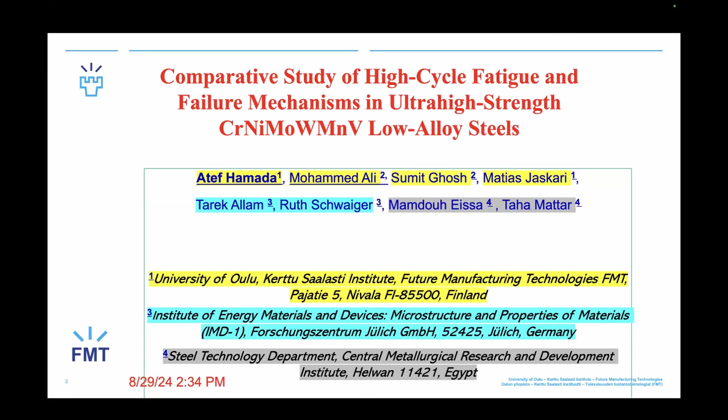This was part of the PhD program from Mohammed Ali, and so Matias, he conducted the fatigue test, and Sumit, he made some microstructure analysis, and Atef Hamada, myself, I conducted fracture analysis and wrote the paper, which in future could be published in this proceeding or journal, but let's see.

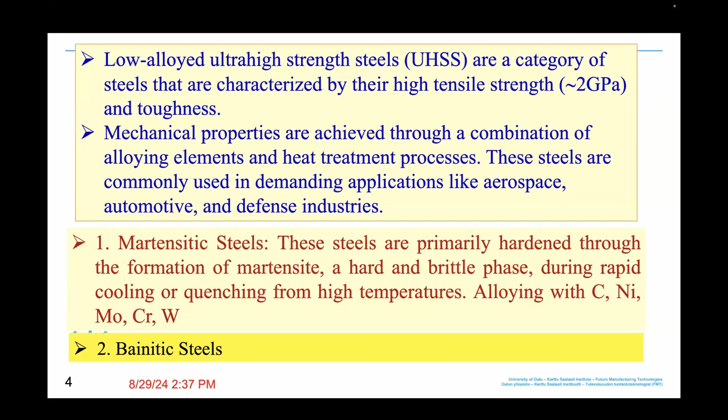So we have different steels based on the design. The first steel of the ultra high strength steel category will be martensitic steel, and this is our steel, and bainitic steel second. Third will be dual phase steel, which consists of soft ferrite and hard martensite phase. Fourth will be precipitation hardened steel, to achieve high strength through formation of fine precipitates during aging treatment.

So mainly this steel is for dent intrusion resistance, resistance for local deformation. For example, during accidents for the car, we could normally use it for automotive panels, and also for military defense structures, because the yield strength should be almost 1 gigapascal, and the strength should be 2 gigapascal. We're not talking about second generation or third generation, but now talking about the strength of our steel.

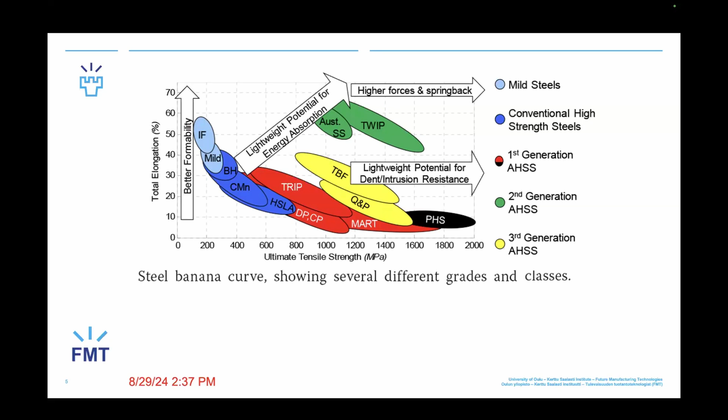This is the banana curve. I think all of us have the idea about this banana curve. Now our study is mainly for designing ultra high strength steel with target strength of 2 gigapascal, and also to study the positive impact of oxide cleanliness, because this steel is melted and cast in Egypt.

But now our friend, he studied his PhD in Finland, and he got this material in Finland and made processing in Finland, but he didn't make electroslag remelting to clean the steel from non-metallic inclusions. So now we want to study the effect or impact of cleanliness on our steel and fatigue behavior of the steel.

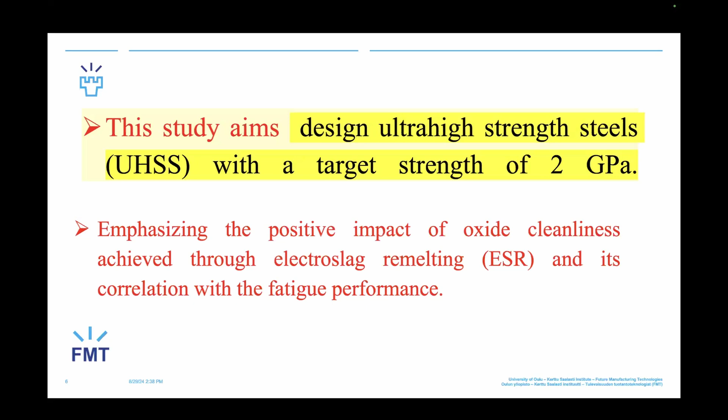Part of this work was published in Materials Science and Engineering A, but here we studied thermomechanical processing and physical modeling and hot deformation for this material. So okay, now we have the second part.

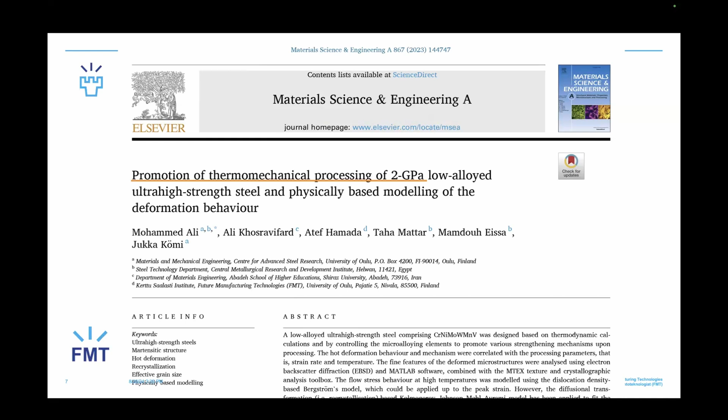Let's look to just 2 or 3 minutes about design consideration of our steel based on chemical composition. You can see here we have two ultra-high strength steels, steel A and steel B. We have differences in carbon content, mainly in nickel content, selecting 2% and 4%. Tungsten is almost the same, and we have moly about the same as well.

During forging and processing of steel A, the structure will mainly be full martensite plus a few percent of retained austenite. But because of the low carbon and high nickel, this steel will enhance bainitic transformation during air cooling. That's why we have carbon at 0.3 and chromium slightly higher than in the second steel. Chromium is a strong carbide former. We have moly and vanadium and tungsten in both, but mainly the difference is in carbon content and nickel content, because this enhances full martensite.

This steel will have almost a dual phase structure: martensite plus about 50% bainite.

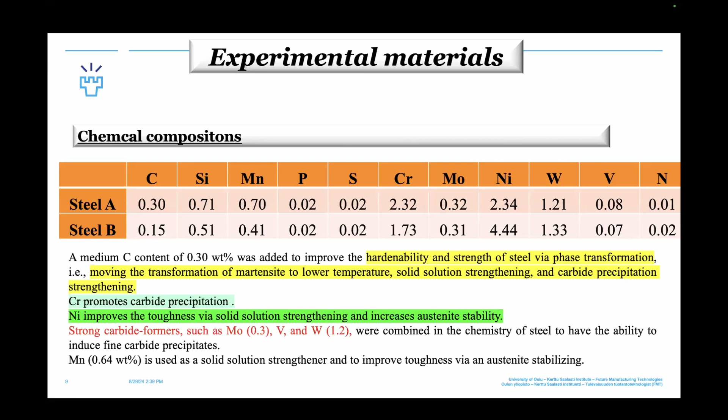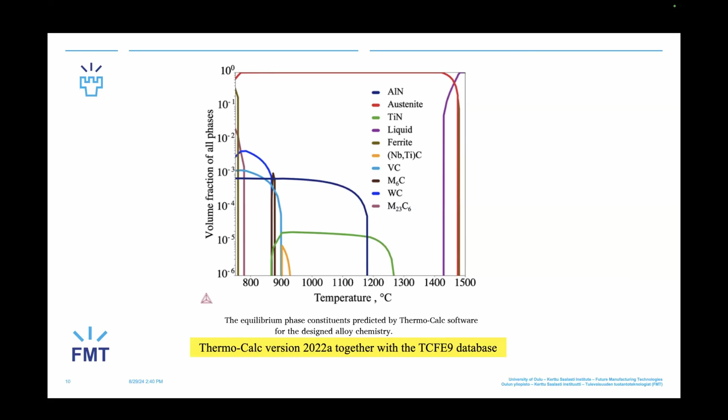This is a ThermoCalc simulation from the first steel using the TCFE database. You can see different carbides that enhance the strength and yield strength, mainly tungsten carbide, vanadium carbide, and niobium-titanium carbide, and mainly the matrix will be austenite, so during air cooling it will mainly transform to martensite.

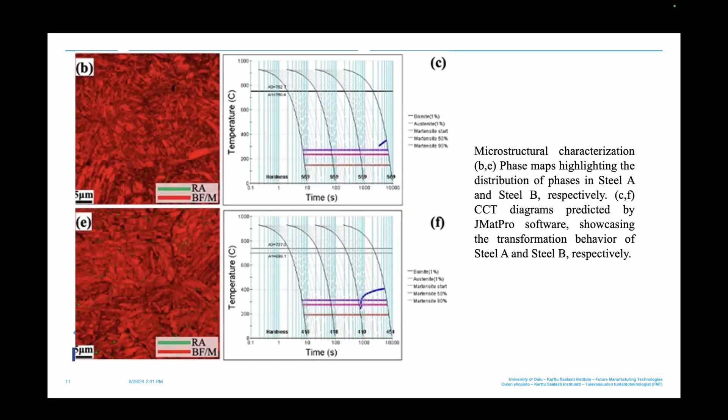So here we have this theoretical CCT diagram, but actually we can see now from the results. Of course, we started fatigue testing under force control with stress ratio R=-1 using an Instron model 8800 control, and we also have this very strong machine with load capacity of about 250 kilonewtons.

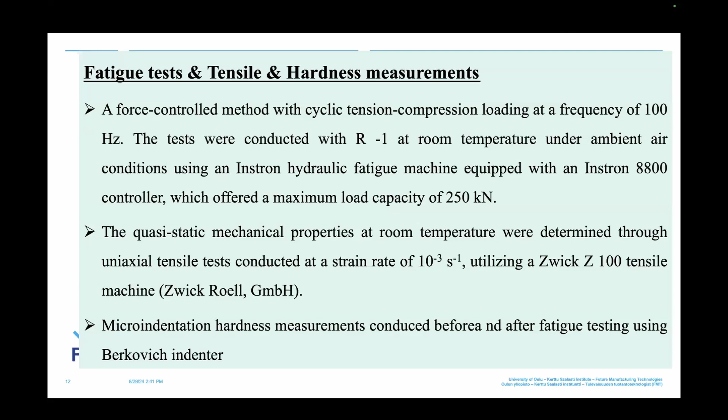After that, we studied the mechanical properties using quasi-static testing with a Zwick machine at a strain rate of 10⁻³. We also studied micro-indentation hardness to see the cyclic softening and hardening effects, the effect of cyclic deformation on the two materials.

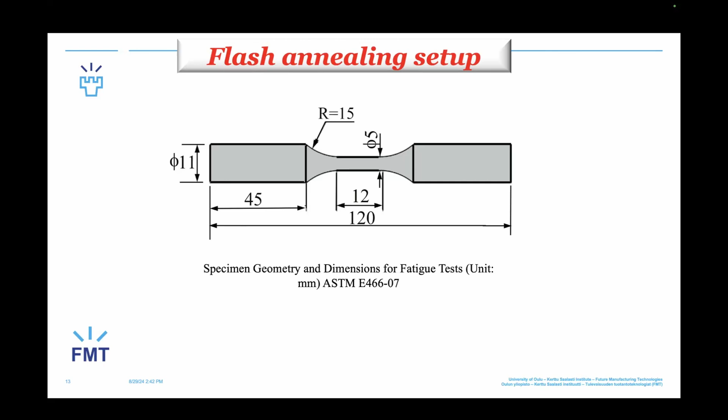In the research center in Germany, we used this new microscope called RoboMet 3D. This is a new technique to detect non-metallic inclusions or any defects in cast material using a robotic system. It performs mechanical polishing automatically.

For example, you can order the robot to perform 1 micron mechanical polishing, then take a picture, and send the robot back to perform another 1 micron polishing step, repeating this process. After about 72 images, it reconstructs the images and gives you a 3D representation of non-metallic inclusions.

It's very interesting, this new microscope at ULH in the research center. I will now present the results of RoboMet to show how this technique can be used to detect any defects in the material.

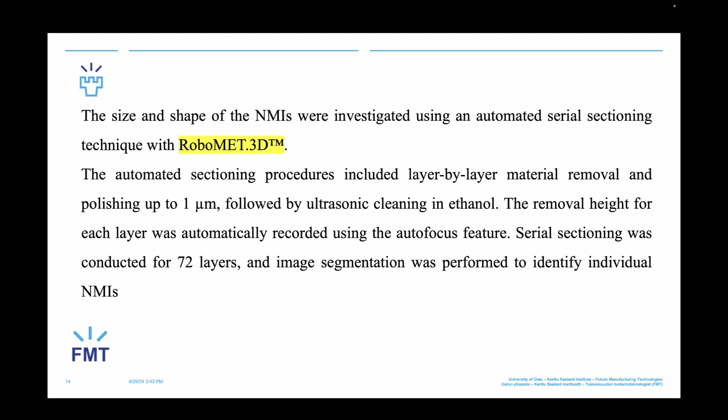If you're experienced in steel microstructure, it's still difficult to distinguish exactly bainite from martensite. So we need color etching to precisely calculate the volume fraction of martensite and bainite for this steel. This is fully martensite with just 5% retained austenite.

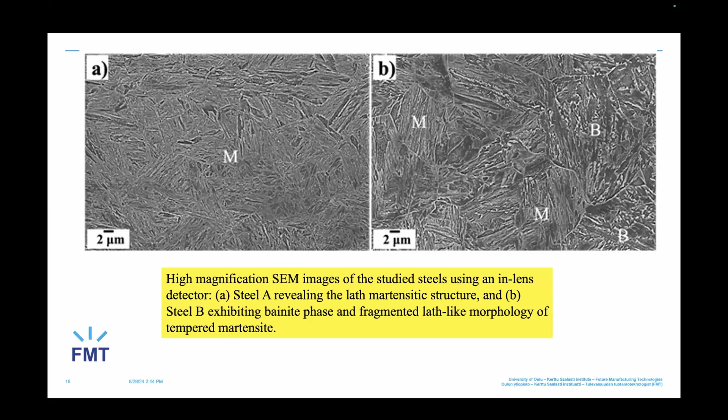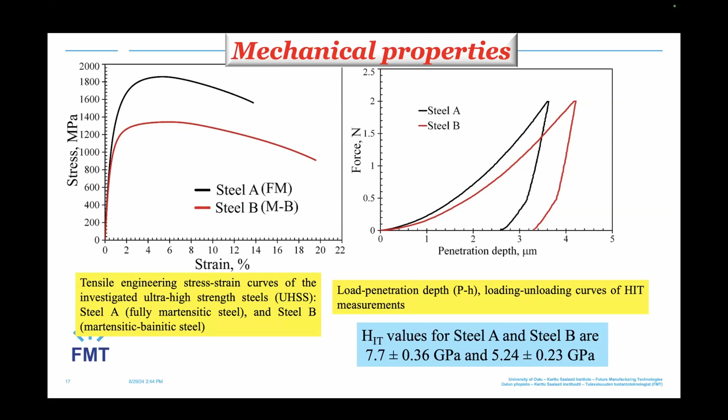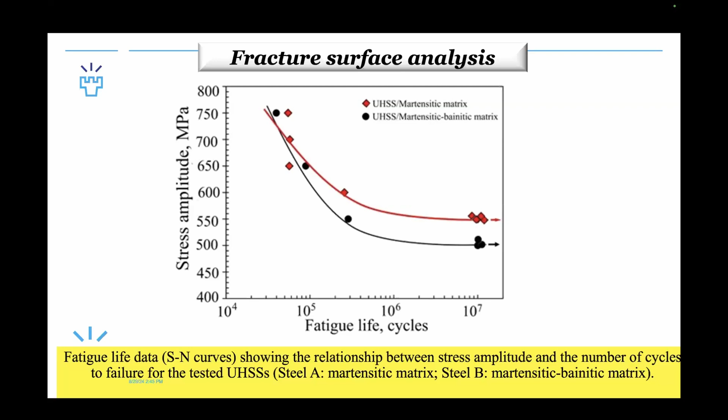We should focus on this point because our colleague Matias is familiar with it. He normally repeats this fatigue limit point 3, 4, or 5 times to be sure there's no fracture at this stress amplitude without failure. Of course, with increasing stress amplitude, fatigue life decreases. But we can see steel A, with fully martensite structure, shows higher fatigue life than steel B, which includes martensite and 50% bainite.

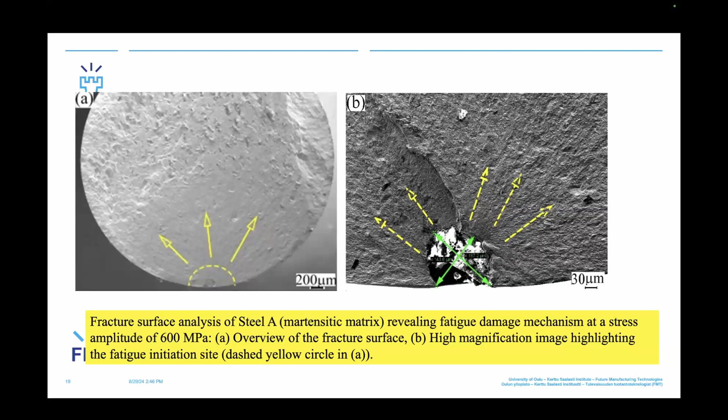At high magnification, we found some non-metallic inclusion with dimension about 150 microns, a big inclusion, which caused the fatigue initiation region. Unfortunately, this particle came to the surface, which increases stress concentration, since we know stress concentration is higher at the surface, for steel A.

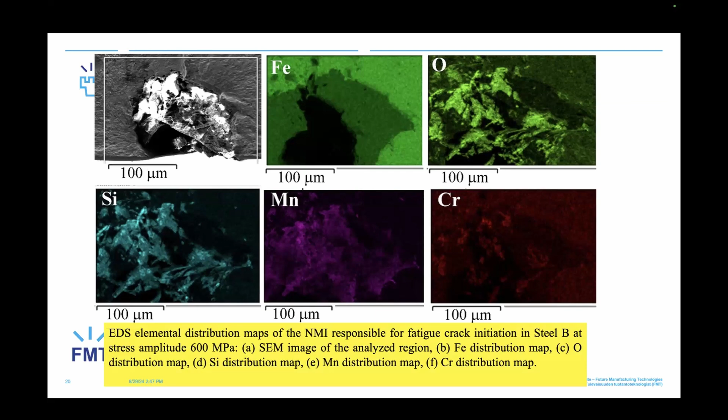We performed EDX analysis to see the chemical composition of the non-metallic inclusion. It was mainly silicon manganese oxide, since we have oxide in this particle along with manganese and silicon, so it's mainly manganese silicon oxide.

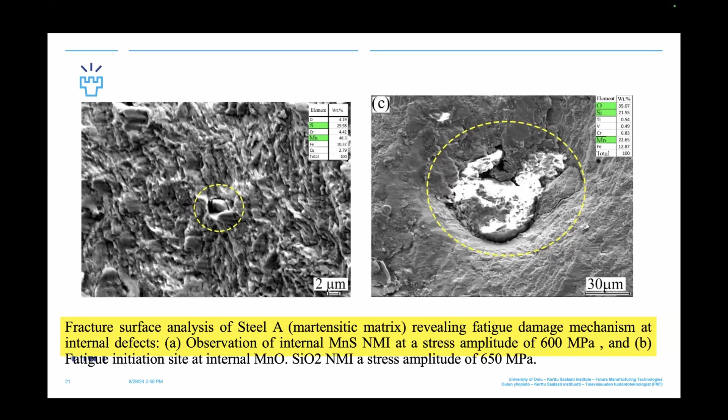In the middle of the material, we also found some non-metallic inclusion, and this big slag also contains iron manganese silicon oxide. Because, as I told you, this is not a clean steel, but still the fatigue strength remains high at 550 megapascal. For steel B, we have the same problem, with non-metallic inclusion at the surface.

Here is the crack propagation region, and here the overloaded region. We also found iron oxide in the middle, but it didn't cause crack initiation.

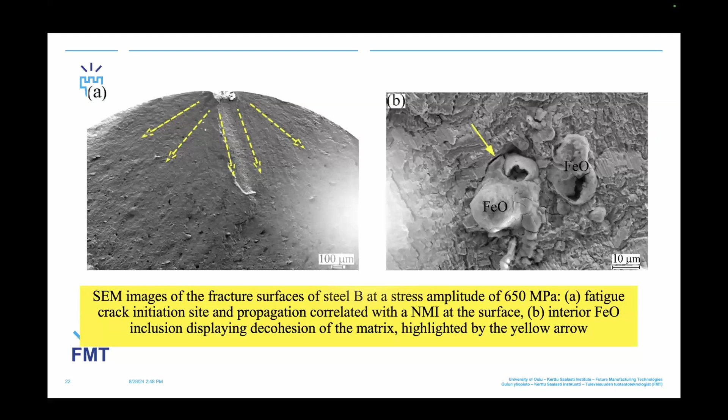We performed the same EDS analysis for steel B, and found the chemical composition was mainly silicon manganese oxide.

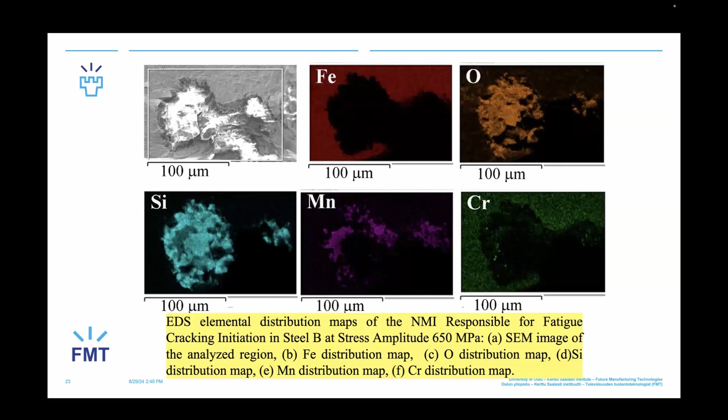We also performed chemical polishing to show that inside the material, internally, we found edge cracks.

Sorry, this is my wife calling. I'm sorry.

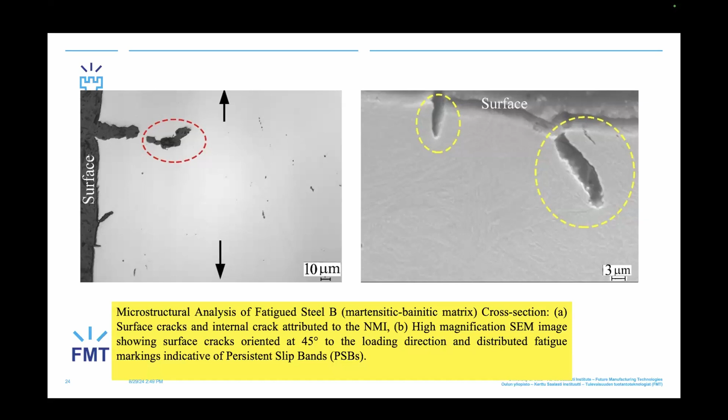I'm sorry, I stopped. Okay, here we have an edge crack, and in steel B, we also found some cracks following the slip band, at 45 degrees.

Okay, no, let's stop this one. I just wanted to show it.

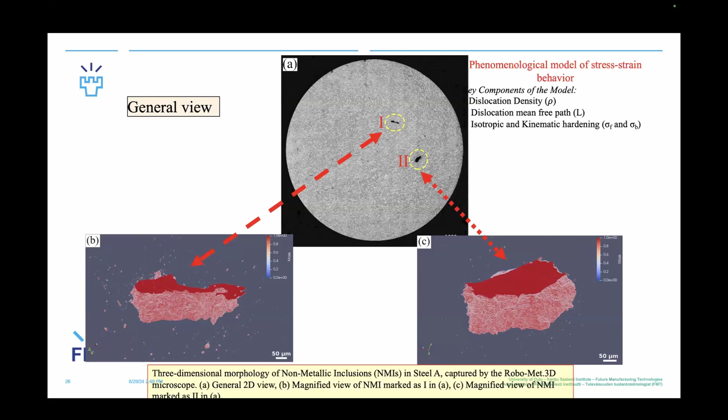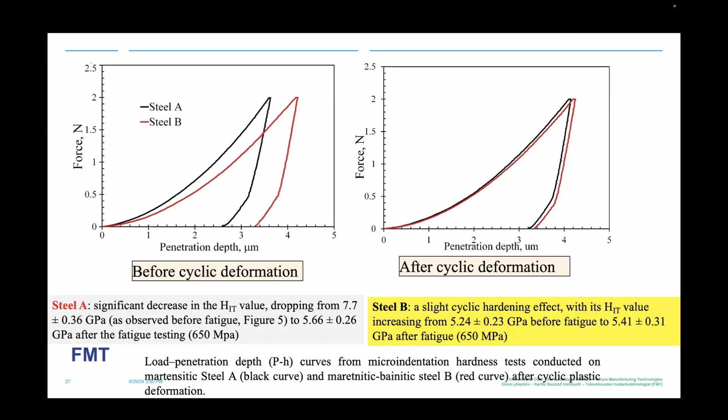You can see for steel A, the hardness value dropped from 7.7 to about 5.6, meaning there is softening in the martensitic steel A. But for steel B, which includes bainite and is softer, during cyclic fatigue there is hardening, increasing from 5.2 to 5.4. This softening and hardening is due to phase transformation.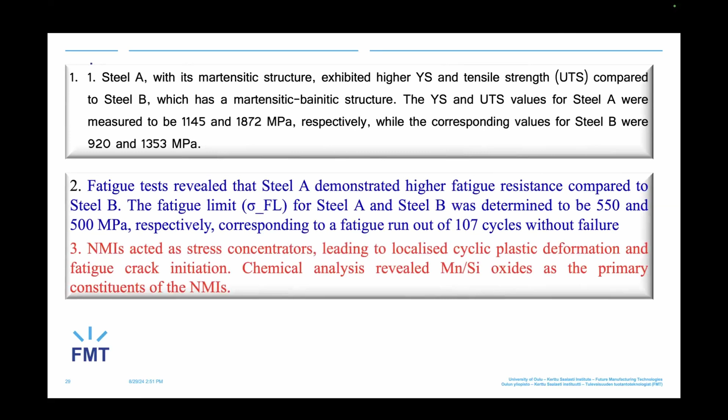So, this is the conclusion. We found that non-metallic inclusions, because this is non-clean steel, act as stress concentrators for localized cyclic plastic deformation, and this is the main reason for fatigue crack initiation.